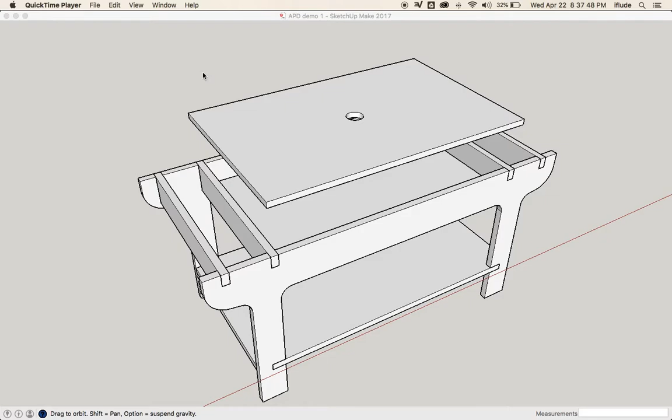I've got this Sketchup drawing here, which is a slightly different version of one of the exercises you did when you were learning Sketchup. This is a little coffee table with a top on it, and it's got an area inside for storage. I want to use this for my demonstration.

First of all, making the actual exploded view itself. The purpose of the exploded view is so that people can see what all the different parts are, and also how they fit together. They should also be clearly visible, all of the parts, so that you can give each part a number. Okay, so let's do that.

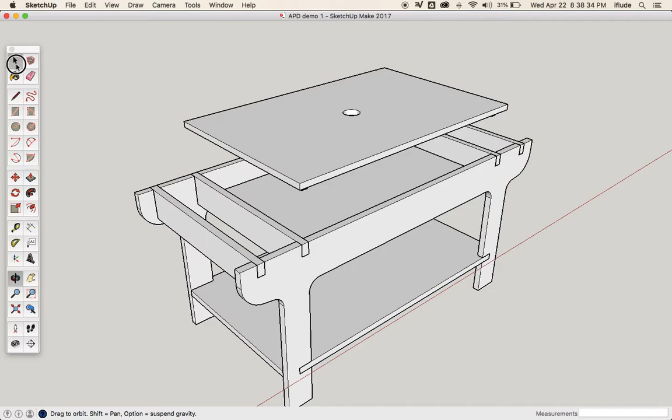So all you really need for this is the move tool, and you just need to select your parts and move them in a logical way away from each other. You can see I'm on the green axis here, and I'm going to do the same thing with the front part of the frame, which is identical.

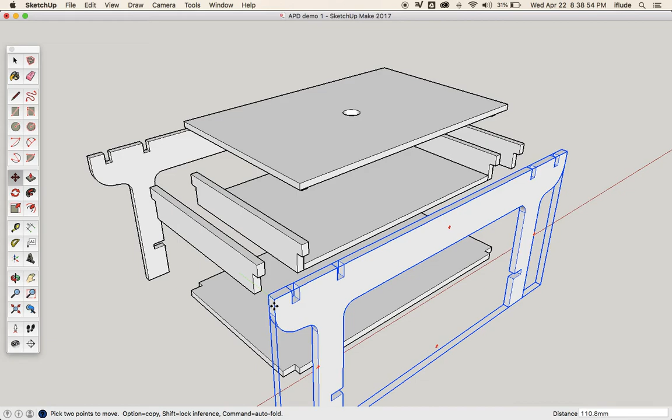Already you're starting to see, because I'm moving it vertically or horizontally, how all the parts fit together. If you were to just move them a bit randomly, it would be much harder for somebody looking at your drawing to see that.

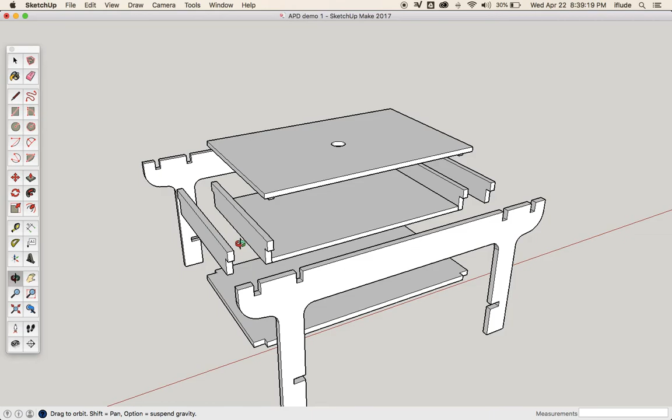Now the other thing I need to do here is I've got this lid that goes on top of the table, and it sits in between these two cross members. It's also got these two parts here, which are themselves separate parts, and those ensure that it fits in the right place when you put it down.

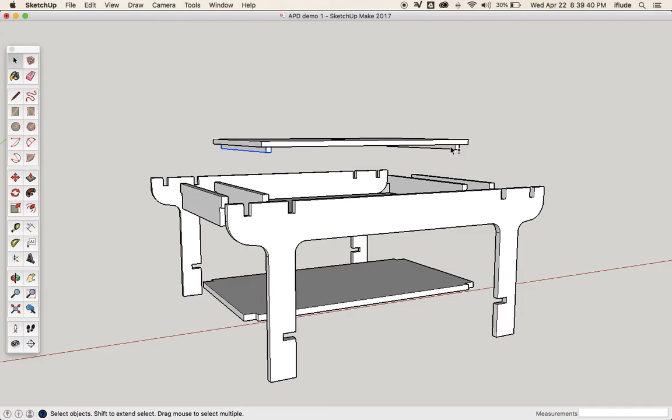So I also need to make sure that I move first of all three of those parts up a little bit, so that when I copy and paste this, it's going to be visible, all the parts are going to be visible.

Then what I can do is I can deselect this one. I'm holding down Shift to deselect it, and then I take my move tool. Because I only deselected this one, you can just about see behind it, these two parts are still selected. I've just moved those down vertically slightly so that you can see those as well.

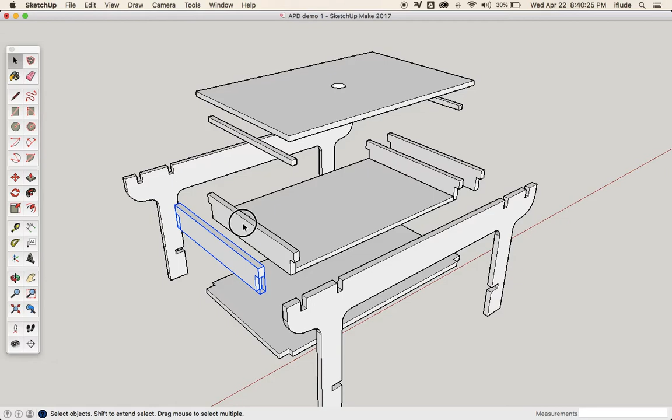Now the one last thing I need to do is, for an exploded view, every part needs to be separate from all other parts. So I'm just going to select those two and move them very slightly over here. Not so that it becomes a mystery where they fit, but just enough so that we can see the base of it is also visible and clearly just a plain rectangle.

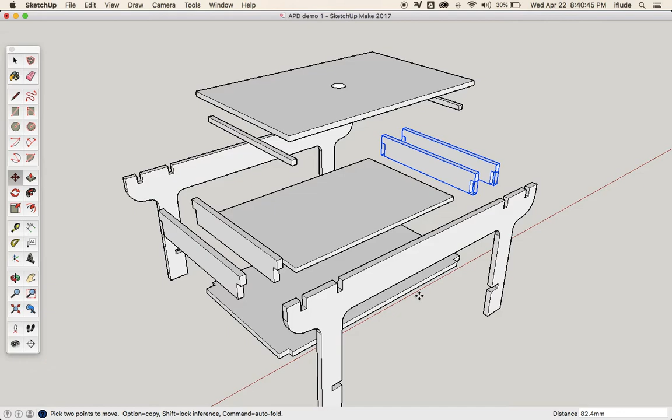Other things that you'll note here, it's really clear that each of these corners has a little corner cut out of it from the view that I've chosen, and I guess that rear one here, you can even see it if you get the right angle.

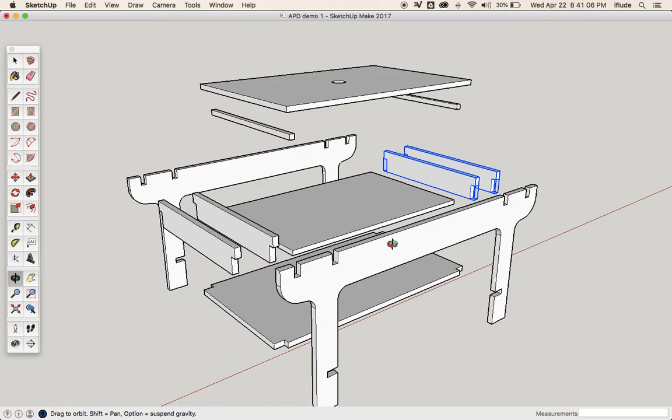Now I'm actually pretty happy with that angle for my exploded view. What I need to do now, and anytime you're taking a screenshot from your screen, you need to get in as close as possible. So I'm going to zoom in as close as I can without any part of my drawing being missing.

Okay, I think that's probably about as close as I can get. And then I'm just going to screenshot that so that I can bring it into my Google Doc.

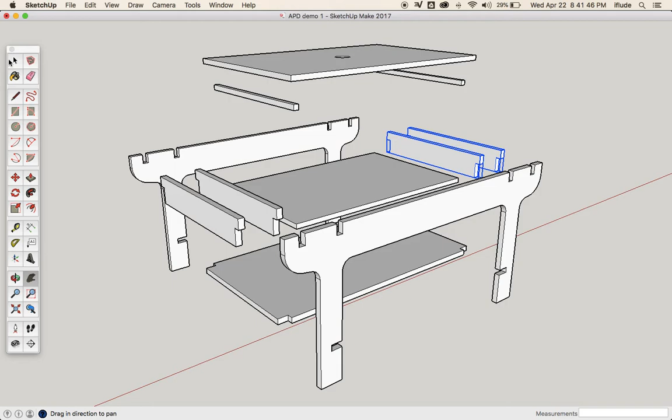Actually I made a mistake there because I left those two parts selected, so these two over here. So I'm just going to deselect and then take that screenshot again, make sure I get everything in, and there I have it.

Right, so now what I can do is I can go to my Google Doc that I'm going to put this into, and instead of, a lot of people make the mistake of inserting an image, what you actually need to do in this case is insert a drawing, a new drawing.

And then when you do that, this pops up, and you've got quite a few edit features right up at the top here, and the first thing I'm going to do is get an image. The image, of course, is the screenshot that I just took.

So let me just go to my desktop and find that screenshot. That's the one. And now it's going to upload into my document. Okay, and there's my drawing.

Now, you may already know that in pretty much every Google editing suite, you can just double click on an image and it gives you the chance to crop the image. I don't need any more of my image around the outside of my drawing or of my product than there needs to be.

So I can just crop it pretty close to the edges. That's already fairly close. I can bring it a little bit closer. And you can see now I've saved myself all this space around the outside, which really focuses the viewer's eye on the drawing.

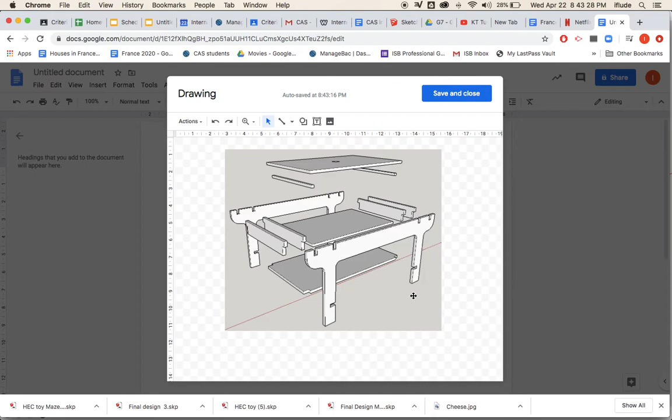Now, I always find as well that it actually looks a lot better if I put a line around the outside. So I'm just going to put a very thin, dark line around the outside of there and just move it so that it's at the center.

Now I'm going to zoom out just a little bit. That's probably too far, so let's zoom back in again. Oops, that was the wrong zoom. Zoom in. Right, okay, so now what I need to do is label this.

I've got a couple of parts. My front and back part are kind of my prominent parts, so I'm going to make those part one. I can do this just by doing the labeling once. I'm going to spend some time getting the labeling looking really nice, and then I'm going to use it over and over again.

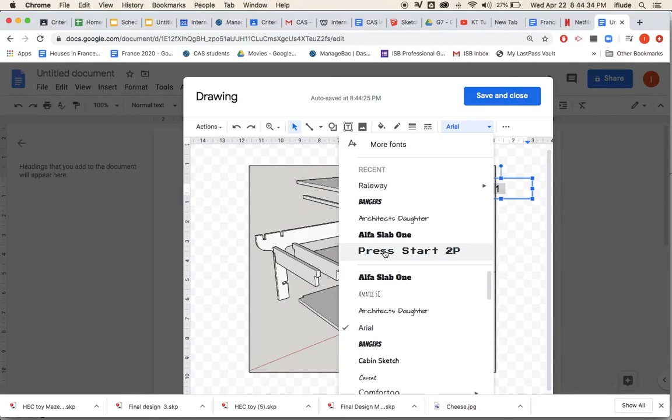For part one, I'm going to reduce my text size slightly, and I think I actually prefer a slightly different font, so I'm going to choose Raleway. I'll make it a little bit smaller. Actually, I'm going to make my font just a bit smaller too, so make that 12 instead of 14. And I'm going to put my text central in that box.

What I'm also going to do is put a line around the outside of that, and this time make it just a little thicker, because those are things you really need to pay attention to. And the final thing is I'm going to put some color in here, so make that orange. Now it's really visible what part one is. Okay, now it will be visible, should I say, once I put in a line.

Now I can choose various different kinds of line. I'm going to choose an arrow, and when I draw my arrow, I can lock it onto one of these corners. Currently I've got a point on the end, but actually what I want is a dot like that. Delete that. I can then move this block and the line, because I locked it onto this little corner, it will move with me. So obviously I'm going to need to... oh, it didn't move with me that time. Okay, I've snapped it back onto there, and now I've got part one.

Now what I need to do is label the other part so people know it's identical. I'm going to make a copy of this, holding down Shift so I can select the line and the text block. On a Mac, when I hold down my Option key and drag that, I can drag a copy of it over here, move the line, and now I've got part one, the two different instances of part one labeled. Now I've got another couple of parts that I need to label, and then I'm going to go through that.

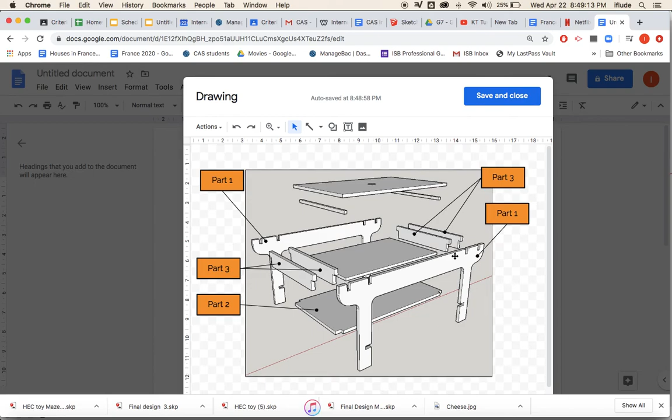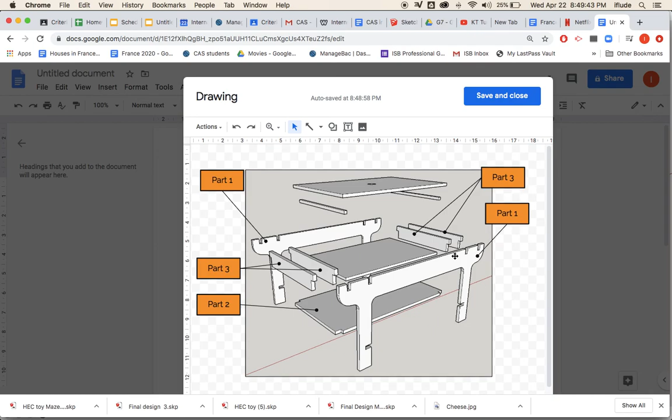Now, there's quite a bit more labeling to do, but I'm not going to go through the whole thing because by now you get the idea. Make your box once, make your line once, get the format correct, and then by holding down your Option key on your keyboard, that's if you're using a Mac -- I think it's your Control key on a PC, you'll have to check it out -- by selecting and then dragging while holding down that key, you can make a copy of your boxes.

And this is how you make a real nice, neat, exploded view. When you save and close, that's what you'll get in your document, and it looks really good.